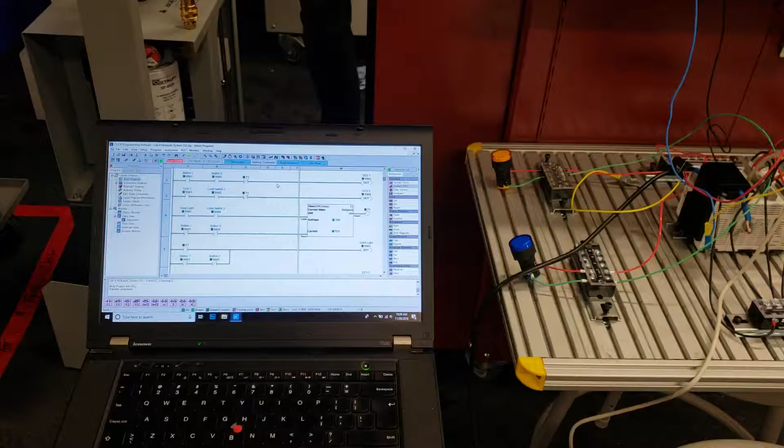Currently we have a setup here. We're using the Click PLC. Apologies about all the wires. And then here we've got a hydraulic setup. We've got two electrically controlled directional control valves. We have two relays, here and here. And then we're using two limit switches, just the top ones up here, and then two 1-inch hydraulic cylinders.

The purpose of this is when you hold down the two buttons at the same time, this blue light here will shine solid to show that the cylinders are extending, and this one will extend first, hit that limit switch, and then once that hits the limit switch, this will go extend.

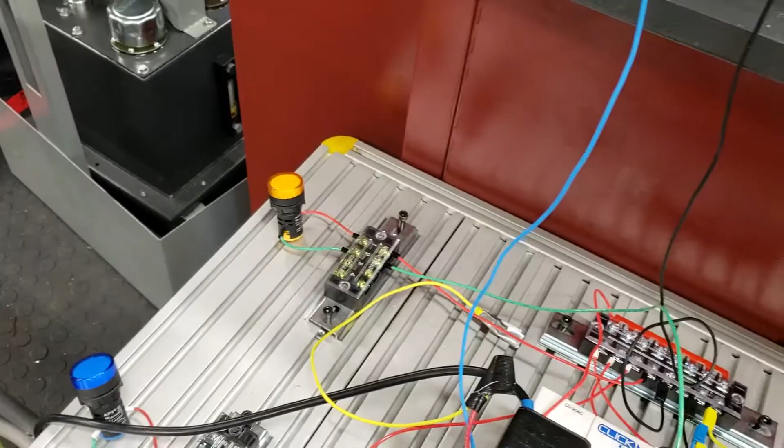This will pause for a second, and then as soon as they start to go down, this yellow light will start blinking to show that they are retracting, and this one will go down first, and then this one will go down. So let me show you my program here, my little ladder logic.

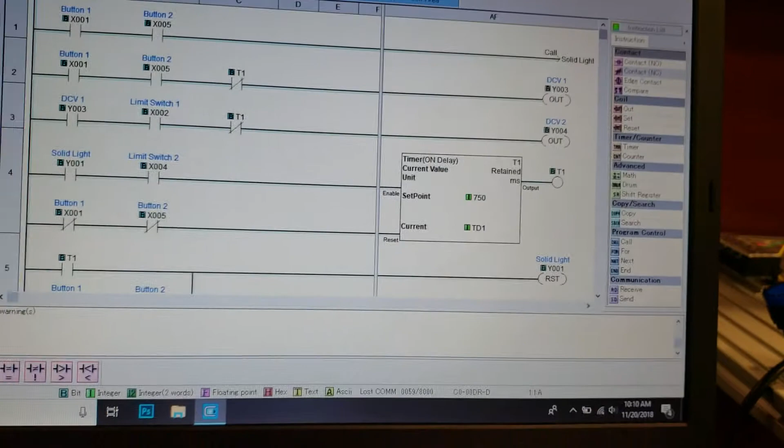So right now I have very simple ladder logic. I've got when both buttons are closed, it goes to the call function of the solid light. So the solid light is simply just out and a return, super simple. Then I have my second rung when button 1 and button 2 are closed, and timer bit is open.

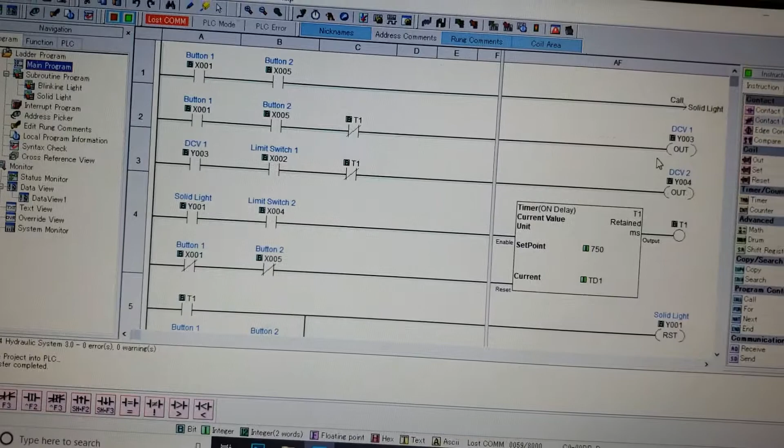The first directional control valve activates and it extends, and then when the directional control valve is extended, the limit switch is hit, the second one goes on, and then I have a timer here for this.

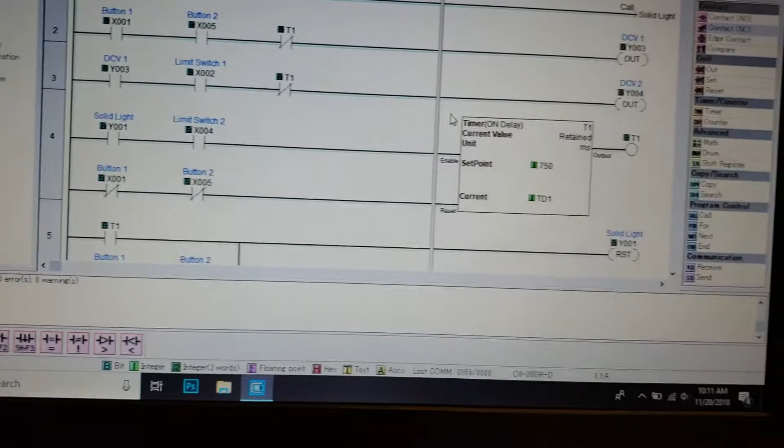Once limit switch 2 and solid light are the set conditions for the timer of 750 milliseconds, this will do multiple things. T1, once that whole bit is activated, will reset the solid light. It will also reset directional control valve 1, and then T1 also activates the blinking light function.

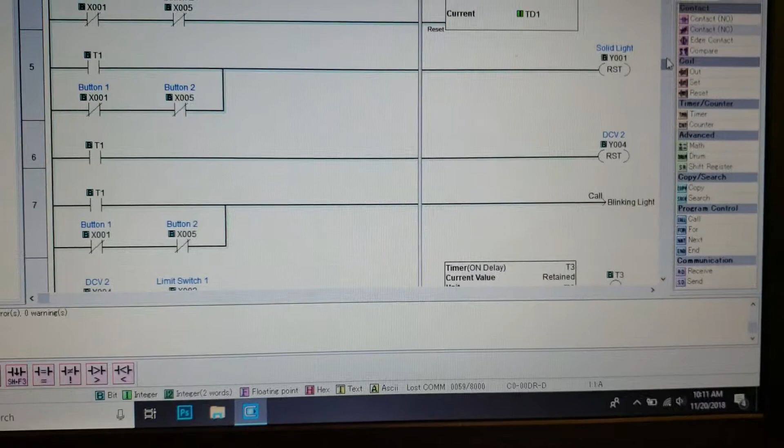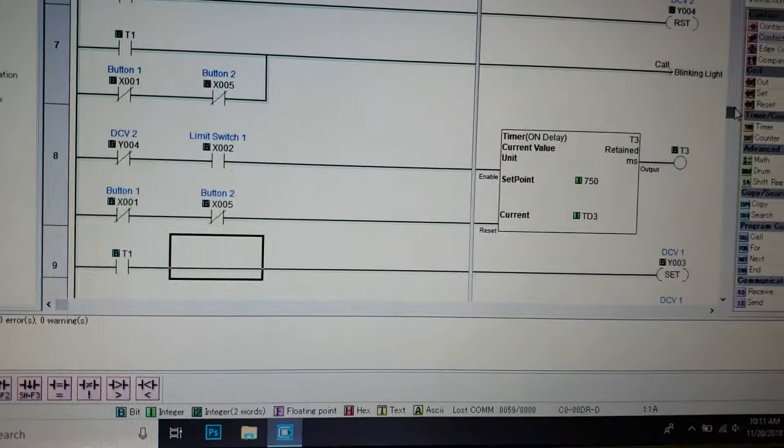And there's an OR condition, and if my buttons are released, my cylinders will retract and also activate the blinking light. So, in order for one to retract, I have another timer here, directional control valve and limit switch. Limit switch has to be closed, but the directional control valve for the second one has to be open for this to enable 750 milliseconds and a T3 bit.

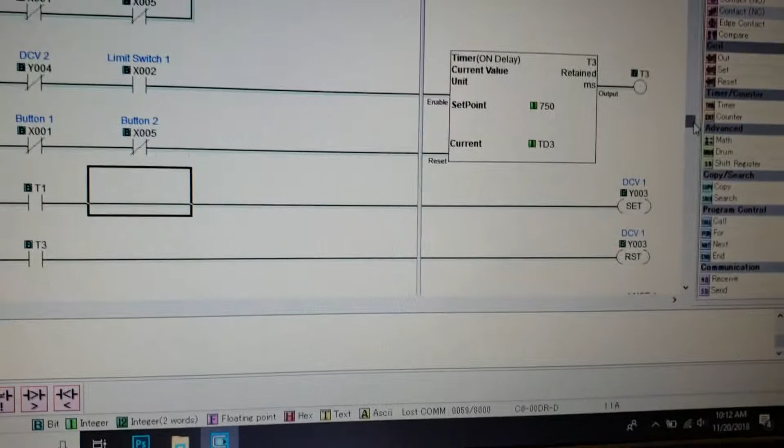This T3 bit will reset the first directional control valve, so it has to wait for that T3 bit. The first bit, the T1 bit, sets the directional control valve, so it waits for the second one to go down, waits 750 milliseconds, and ends up going down itself.

So let's see this whole thing work. Let's turn that on, turn this on. And if you would press the buttons, please, as you can see. Alright, let's do it one more time. One first, then the other, waiting. And then if you release it, they both go down.

And then one, and then the other. And then as you can see, when you extend it, the light goes on. And then the light blinks when they retract. And there is my setup.